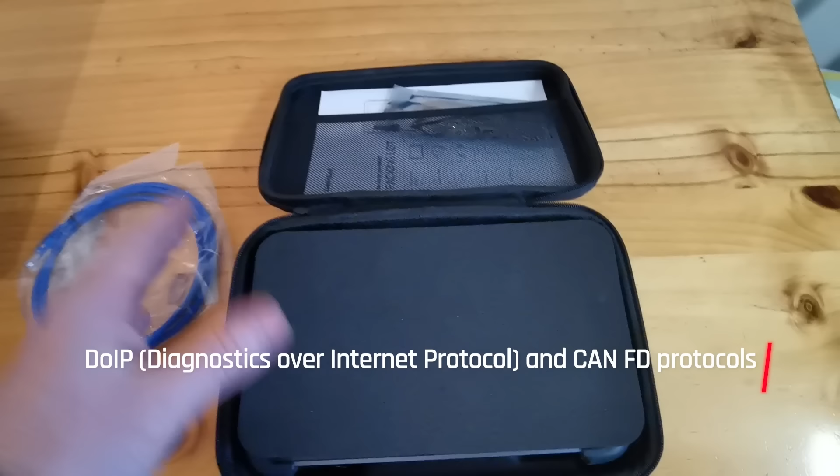So case wise, I absolutely love this type of case. Very nice carry case that you could store in the back of your car if you're traveling and you want to have a scan tool with you, or if you're doing mobile diagnostics as well. It's very compact. On the inside of the case, we have the Ethernet cable. This is capable of remote diagnostics, so DoIP, diagnostic over internet protocol, is capable on this scan tool, which is very good for the price range. What do we have here? That looks like a phone line connection to USB.

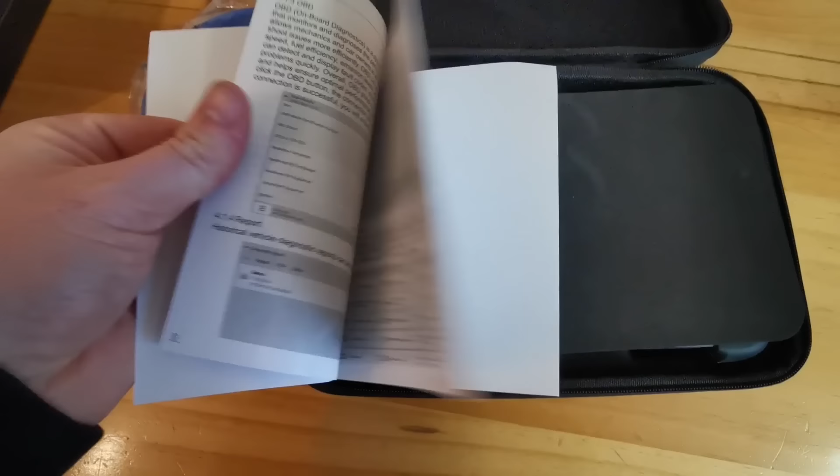Top section, we have the packaging list that comes with it. So we have the scan tool itself, network cable. The F chassis cable is going to be the cable that you hook up the Ethernet connection to while it's plugged in. Packaging list, user manual. So we have the 3-in-1 charger, Type-C cable, network cable, and the dongle, the connector itself. We also have the quick start manual for reference, and a breakdown of what you need to do to start it up or set it up. Foam cover to protect the screen, and on the actual diagnostic tool itself we have a screen protector, which I'll take off now.

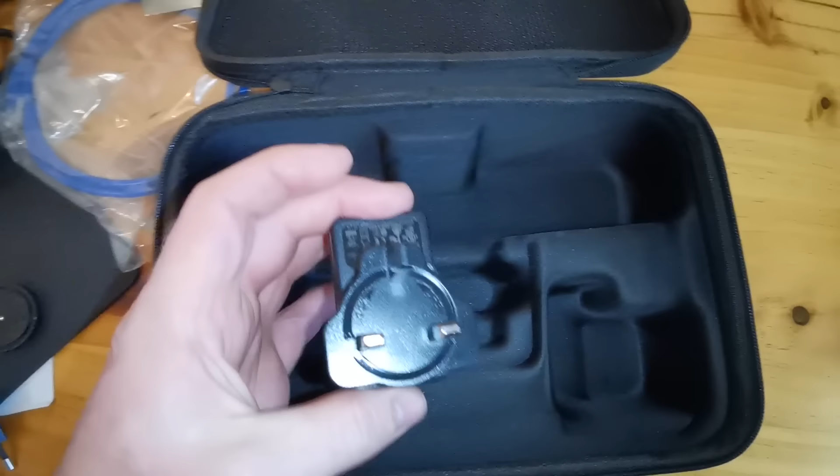Okay, so in the package itself, we have that cable that hooks up. You plug the dongle in one side, you have the Ethernet cable on the other. We have the charge cable. We have the two different connectors, depending on what region you're actually using this in. And this is the one that's suitable for Ireland. There is no connection suitable for Oz in that packaging, but you can get something if you needed it. That's the one that we'll be using in this region. So very nice case, easy storage, nice protective covering. I like that a lot.

Let's have a look now at the actual tool itself. Very nice stand that's on it. That's the full extension of it, but it's rigid, meaning you can hold it on the steering wheel easily. It's not going to flop around.

I have done it on a few vehicles already. This is notable, new design, magnet, so you can just store it nice and easy. There were some other scan tools that you'd plug it into the unit itself, but that's a very nice and simple way of storing that dongle for easy pack away.

On the top we have power button, we have USB and then USB-C, so USB-A, I think, and USB-C. Very nice design. You've got the ergonomic grip at the side. You also got the protective cover. This is the new style design from Thinkcar. So some of their older products were a bit more bulky, and this is more of a sleek design than previously. But that's the back side of it.

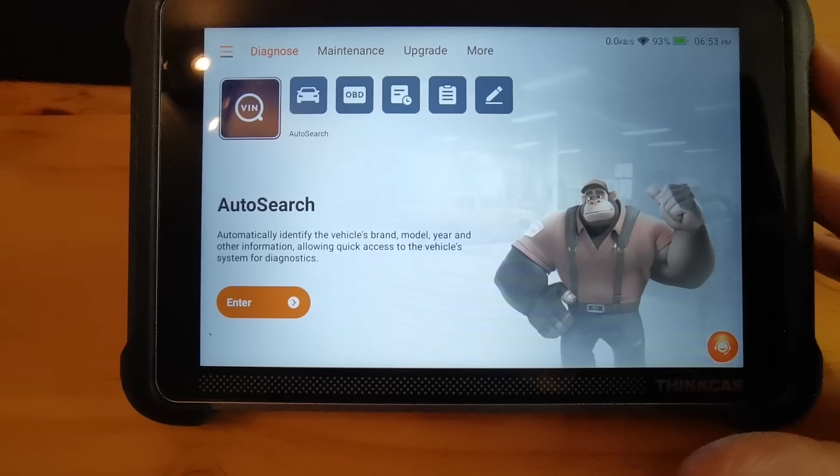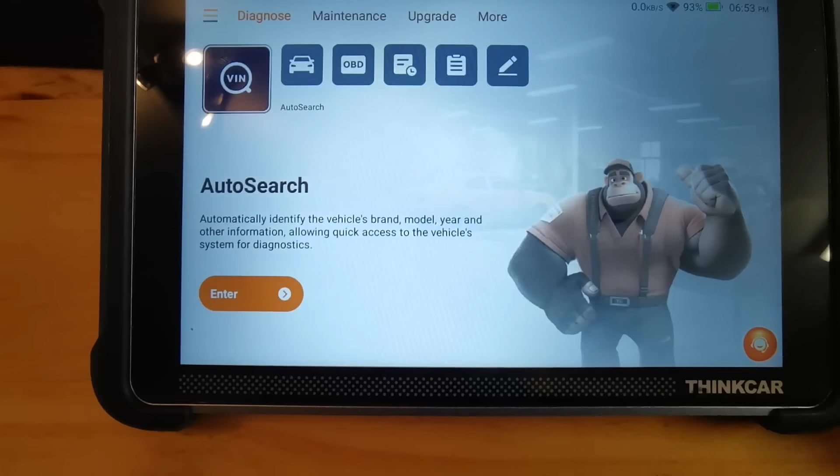I will turn it around and turn it on now so you can have a look at the front as well. Okay, so this is the home screen that you get when you power it on. Up the top section here we have the battery, we have the time. If you're plugged into the OBD, you'd also have the charge rate of the battery of the vehicle you're working on, which is also very useful. Connected to the Wi-Fi, you get the speed of how quick it's operating. Down here is a button for the remote assist, if you needed to use that.

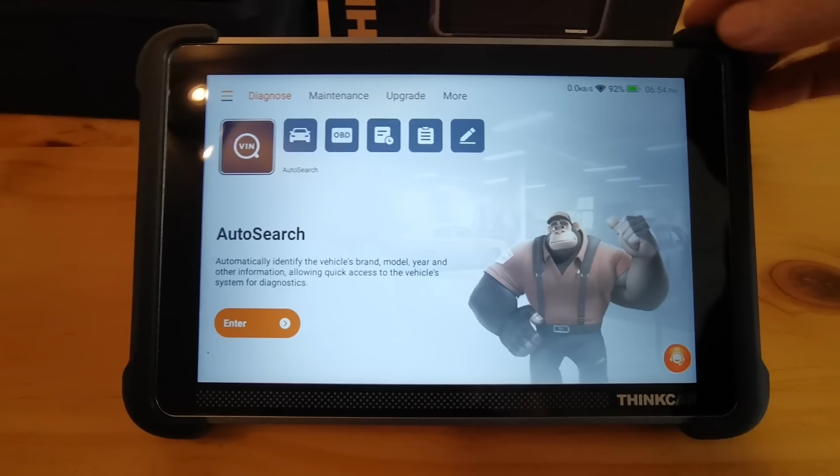But a very nice looking scan tool, ergonomic grip at the side, designed for a workshop environment, so easy, clean, protective. They do drop tests on these to make sure that they're fit for purpose, and they are well designed units.

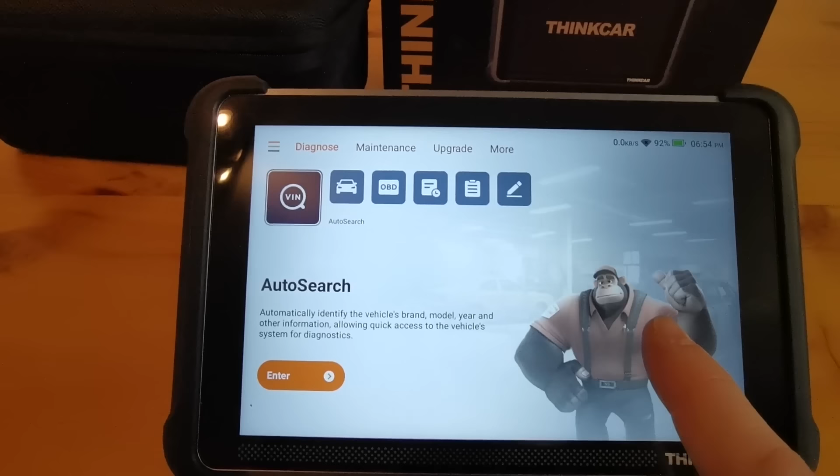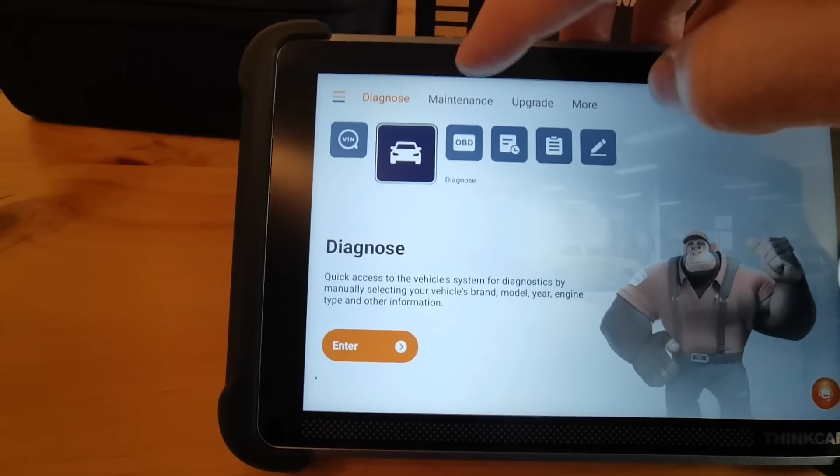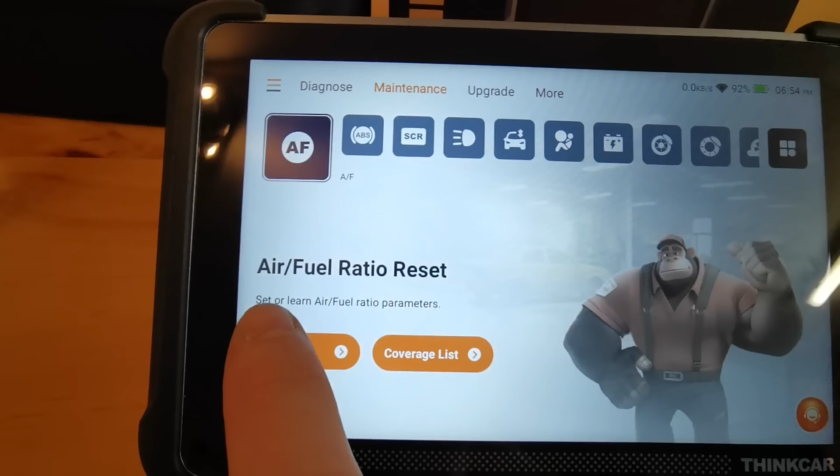Now, for the people that wouldn't be familiar with Thinkcar, this is a new style layout that they have. It's more user friendly, it gives a bit more information, so when you're flicking through it, if you weren't familiar with what the tabs mean, they break it down a bit more down here. So for example, on the maintenance tab, you would have typically seen all of these boxes laid out in a list type form, which you can still do. But this time it gives you what it actually is, so air/fuel ratio reset, and then it gives you a bit more information, set or learn the air-fuel ratio parameters.

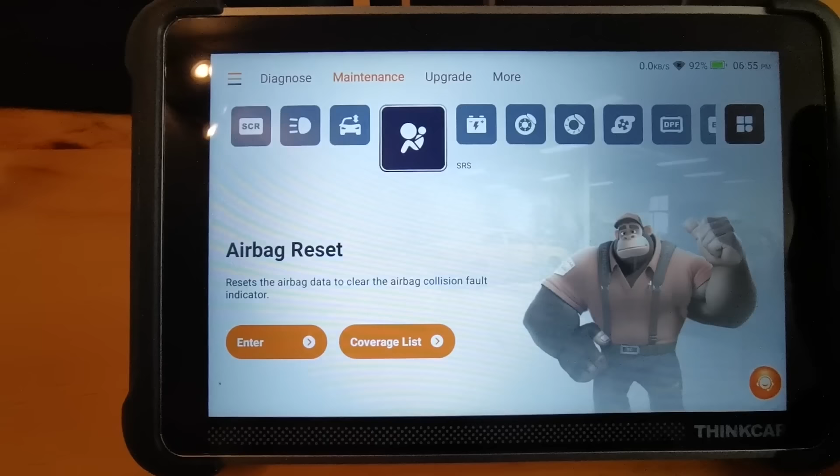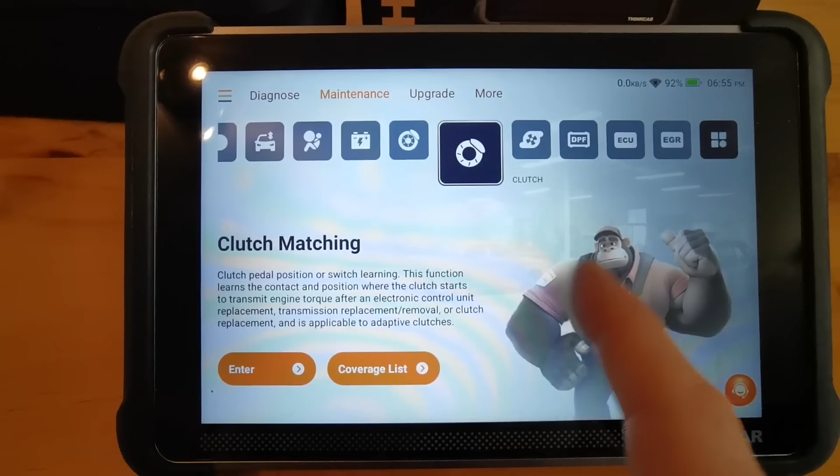So if you go through ABS, then it says ABS pump to push all the air out of the ABS pump, and so on. So you can flick through and it gives you a little breakdown of what that function would be useful for. So again, if you're not very familiar with using these scan tools and these symbols, if you're a DIY or new to the diagnostic scene, you would get a nice bit of information to make it easier for you to know what tab to go in and out of. Now, I have to say it is a very straightforward, basic and simple design, which is user friendly.

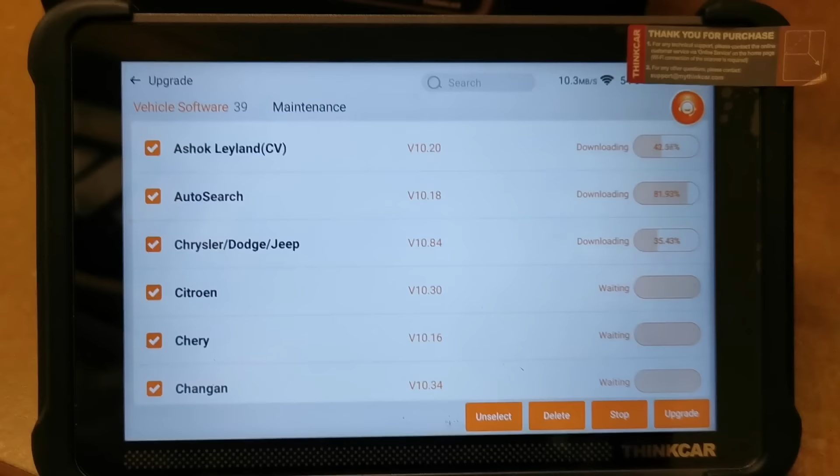Upgrade. I've already upgraded this. There was 40 something when I went on it first. Lifetime updates come with this. So if you go against some of the competitors on the market, some of them can be over $100 a year for subscription. Some of them can be more. So depending on what scan tool you are using, this could be a very good choice to save you money in the long term. Price point on this is excellent for what it says it does.

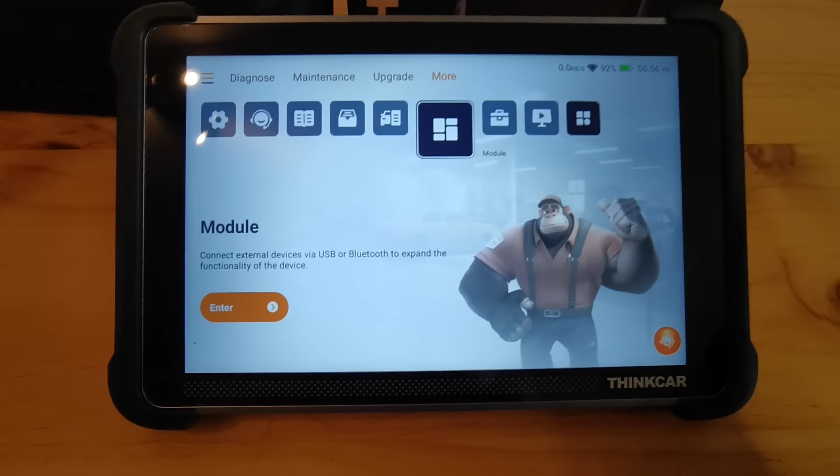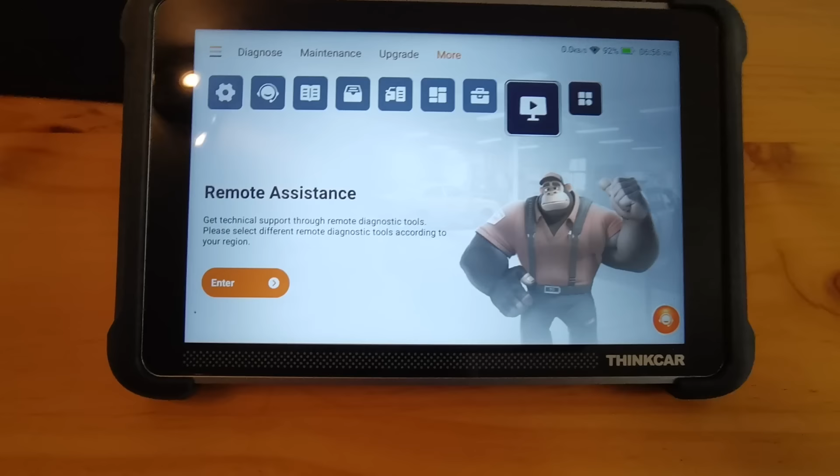I will run it through its paces, but it's a very fast scan tool. I wouldn't expect anything less from Thinkcar. Again, I've used them daily in the workshop now for pretty much a couple of years. I have multiple of their products, and I can say safely they're an excellent company and they make excellent equipment. So if this is anything like some of their other ones, I can imagine it will be a very good scan tool as well. That's an overall layout. That's enough talking on the unboxing and so on.

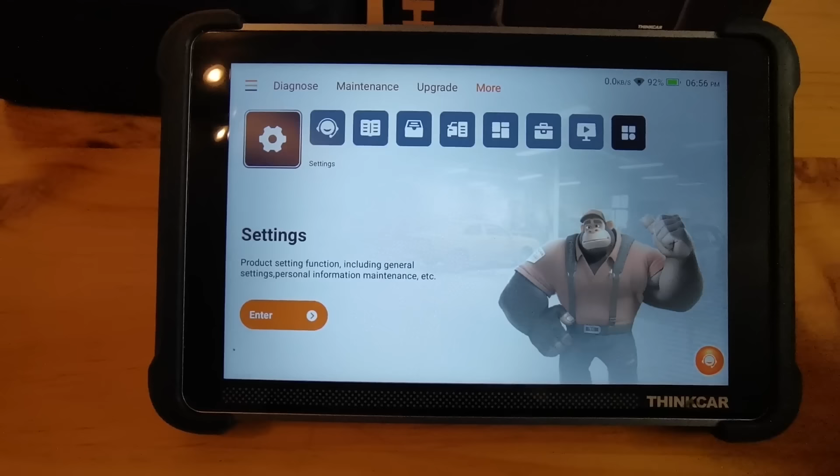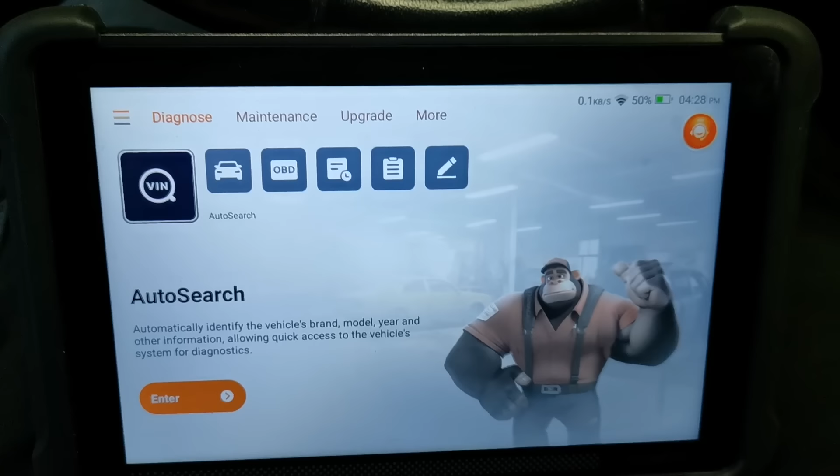I'm going to be testing this out for the next few weeks in the workshop while I'm back in Ireland here. I'm going to be checking on every vehicle I can. There's multiple Fords in the workshop right now. I have Mondeos, I have Focuses. I'm going to be trying it out on those. There's some faults on a Focus that I'm going to be testing. There's other vehicles as well that I'm going to be checking, and I'm going to see what it's like for coverage, what it can do, and how useful this might be in a professional setting and in a DIY setting as well. And hopefully there'll be a very good crossover where if you purchase this, you'll be able to use it in both.

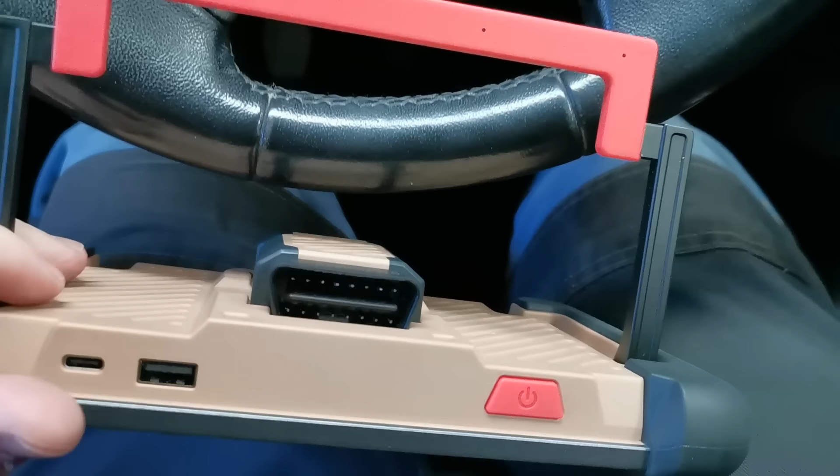Okay, so the first car I'm going to plug into is this Ford Focus. This is a 2011 model diesel. It's got some issues, got some running faults, so we're going to be able to pull some codes more than likely on this one. And I like, in particular, this stand. Sits nice and easy on steering wheels. Feels pretty solid overall. And of course, that magnetic dongle is a very nice touch.

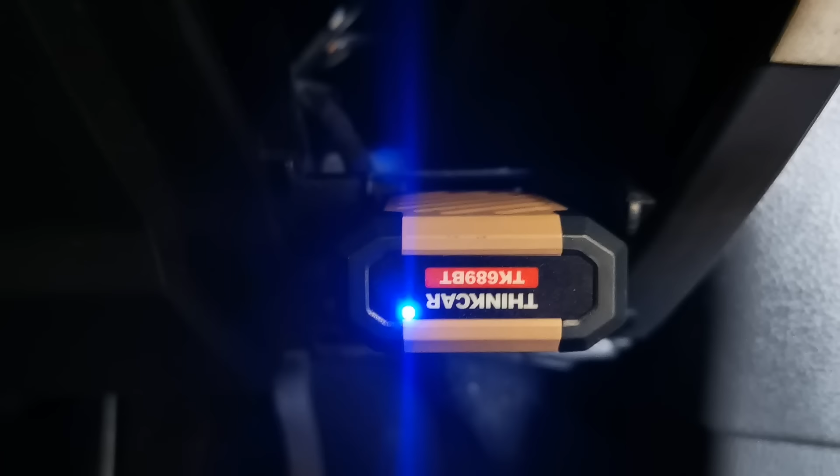So overall, first impressions are nice feel in the hand, good size and fast. When I did all the upgrades to start off, it was very, very quick. I'm connected to the Wi-Fi now as well, so we'll see what the function's like. So I have it connected up to the OBD, ignition on, and we're going to run a scan on it now.

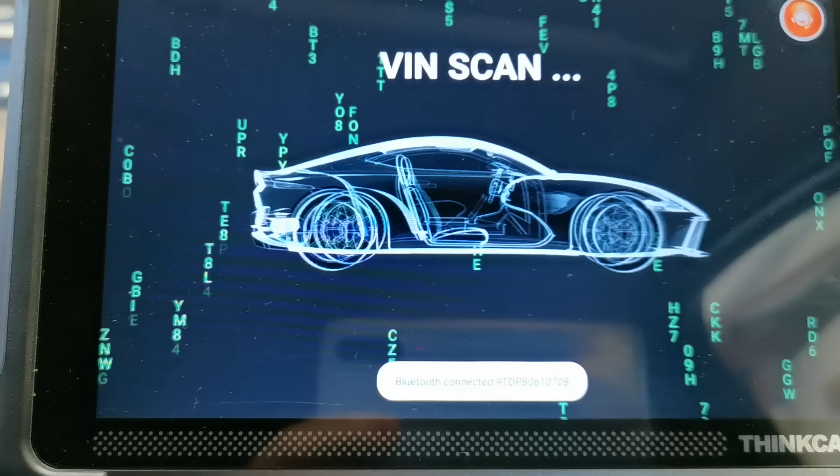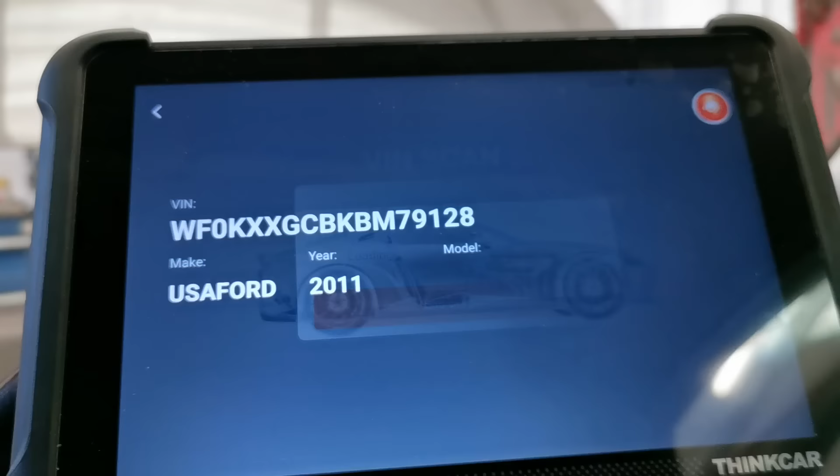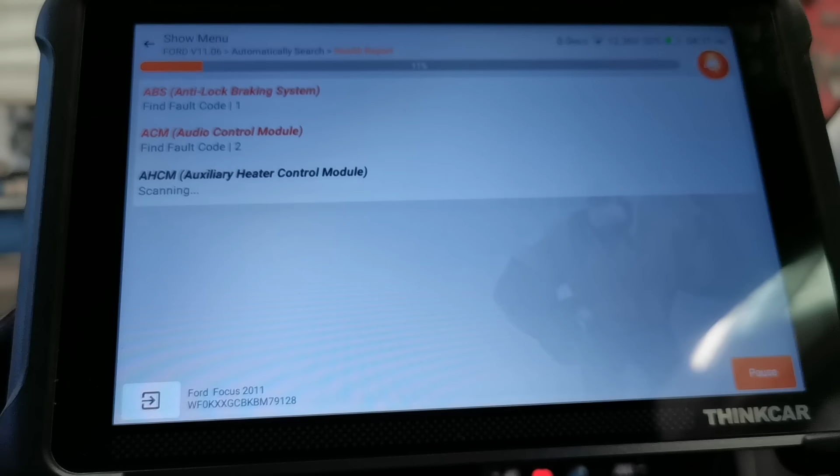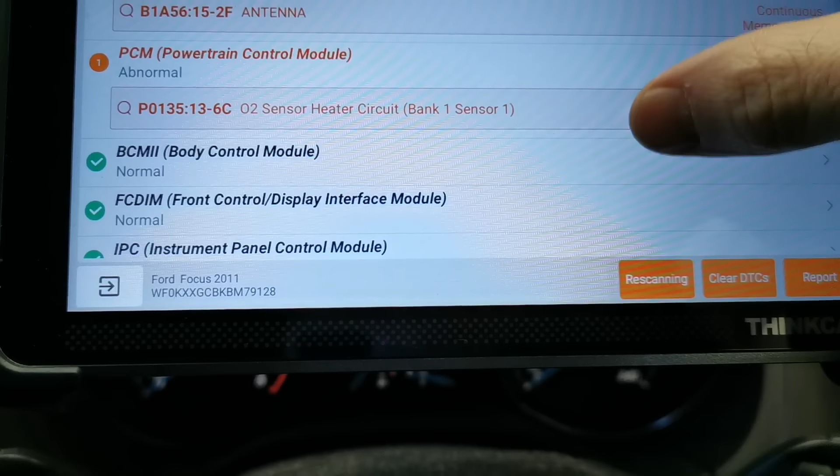So automatically search, okay. Yes. And we're going to do a health report. Okay, so it's gone through the whole process, got taken away from it from an inquiry, so I'm back at it again. We have a powertrain control module fault, that is continuous. I know what that one is.

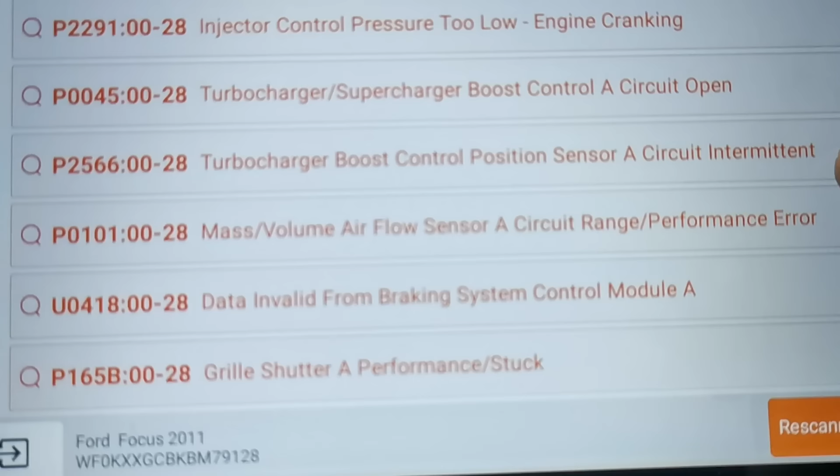There's more issues with this one, but the faults have been cleared previously. And thankfully, here's a screen grab of some of those fault codes before they were all cleared. Now, before I got onto this vehicle and started doing all my scans, there was some major repairs done, including injector replacement, turbo repairs, and other sensor repairs. This was a multiple fault vehicle that was being worked on.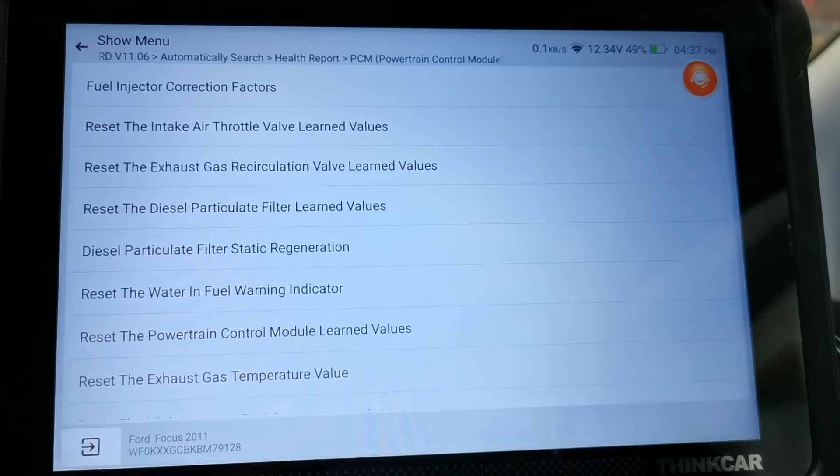The previous tech had done all the fuel related fault resets, like the fuel injector correction factors and relearns on the fuel system. What you're looking at here is me just going through the list of its capabilities on the Focus, and you can see it's extensive.

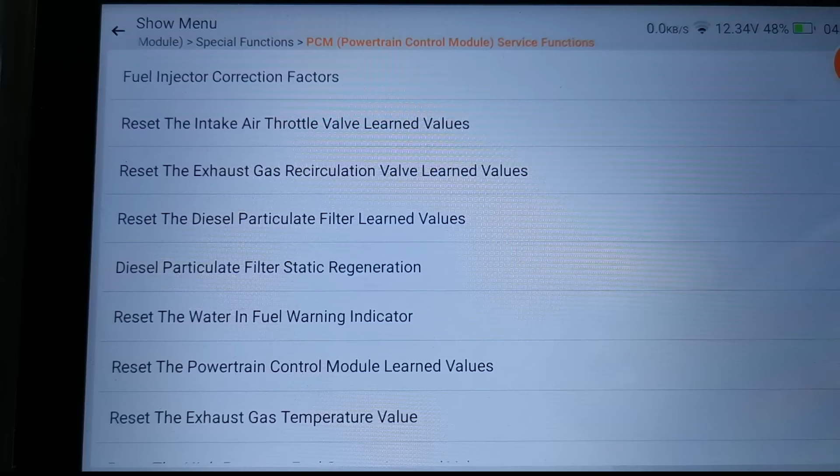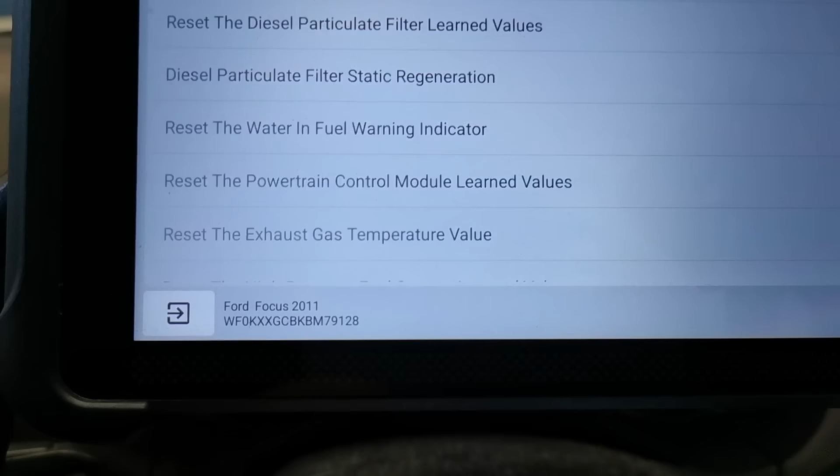You've got diesel particulate filter static regeneration, reset water in fuel warnings, reset powertrain control module learned values, reset the exhaust gas temperature values, and down here reset the fuel injector learned values. That was all done before I actually went on to it, and there was just boost related faults still remaining. Okay, so we got a lot of resets there, which is good. All right, so we're going to go to read data stream.

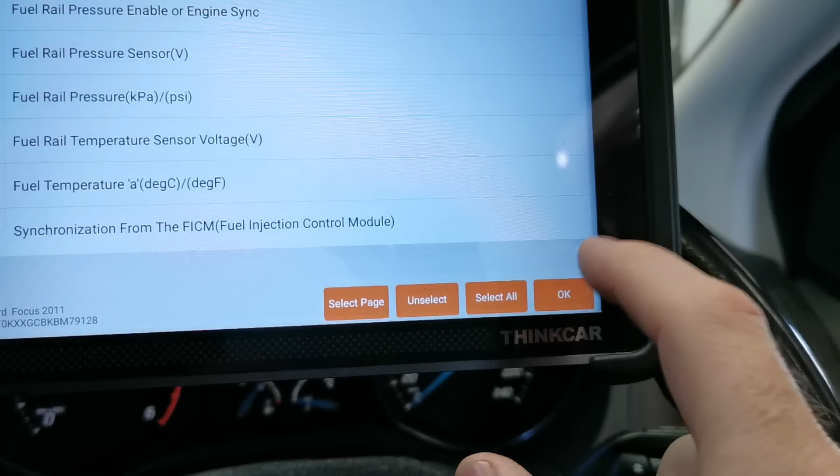And what you're seeing here is the live data information on the fuel rail pressure. So this is something I want to check, as there was injectors replaced. Everything looked good. The graphing functions very smooth in this. I did do a live data test drive screen record, which was also perfect. I then moved on to the turbo.

So on startup, I want to see the actuator arm move. And when the engine shut off, I want to see it go back in the same position again, because there was turbo related faults. One thing I did find out is the turbocharger learned values weren't reset, so that is something I wanted to jump onto after I had done my checks.

Resetting of the turbocharger learned values in this vehicle. It's another item that this scan tool is capable of doing, so it's got a lot of adaptation and relearn procedures that's inbuilt in it, which makes it an extremely useful and valuable tool.

Just pulled in after a large first part of this road test. All the lights are off, performing perfectly, no issues. I'm monitoring live data here beside me as well, using the scan tool, and this is all good. I'm going to give it another extensive drive all the way down, back to the workshop, and if nothing returns, I'm going to put back the covers up and this one will be all done. A reset of the turbocharger learned values is what has cleared this last warning off.

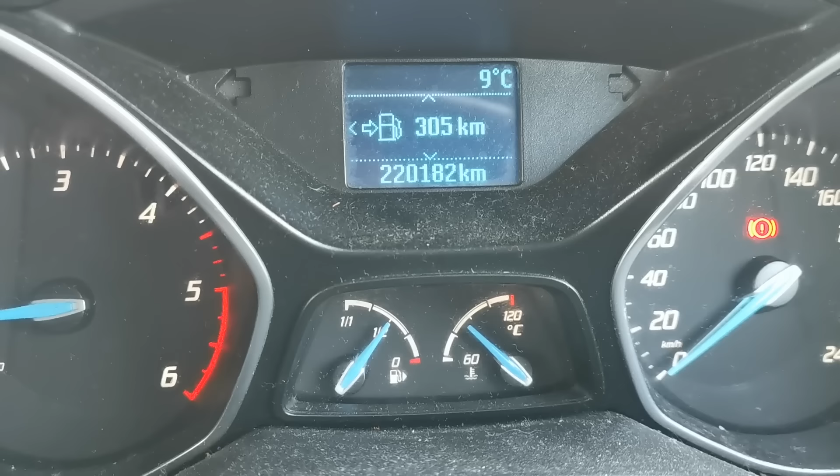And I wanted to insert these real-time clips because it just showcased how powerful this tool is. From start to finish, all jobs were done with this. So injector repairs were done, all live data information was done, test drives done afterwards, and then turbo related faults checked and resets done, which solved all of these issues, and this Focus was now good to go. So a great start to my first impressions on this scan tool, and it was now on to the next vehicle.

Okay, I was just in to change the clock, change it over to a European time zone, and what I found here is something I actually wanted to talk about in this video as well. So FCA Diagnostics and Renault Dacia Gateway Unlock. Security gateways in general. So if you're working on vehicles that have that security gateway and blocking off access, you're going to need a scan tool that's compatible so you can gain access to it.

Now, I've come across this a number of times when I've been working over in Oz, where we've been blocked from accessing certain, whether it's fault codes, whether it's certain parameters you want to check on. It's Jeeps mainly that I come across it on. But recently, even up to a couple of months ago, I wasn't able to do a service reset on a Jeep. I was blocked from accessing it. There was no manual reset, and it was going to have to be done through a scan tool.

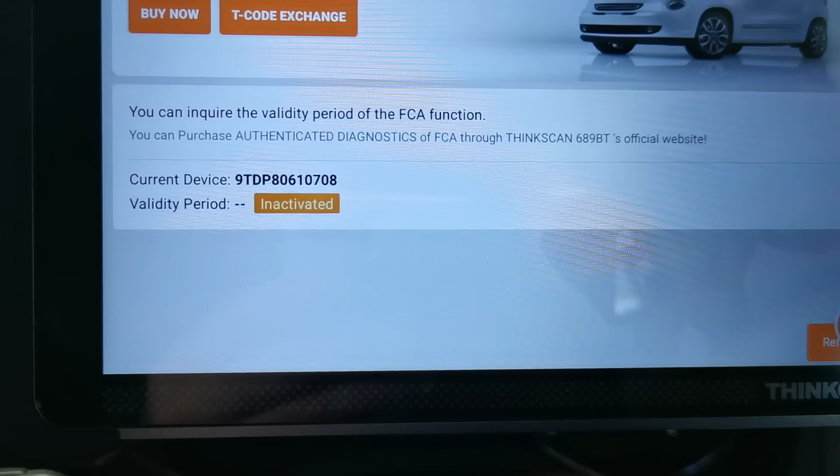And what you have to do for that is register. So if you've never come across this, it's fantastic that a scan tool like this is capable of doing it. It is an add-on cost, but if you're working on a lot of these vehicles, it'll be useful to you.

So it just shows here that they have authentication to do it. Thinkcar has cooperated with the FCA, and you only need to purchase authenticated diagnostics on the Thinkcar official website. You can directly use this device to diagnose using advanced diagnostic functions. So you have full capabilities when you purchase it using this tool.

For any of you that aren't familiar, there used to be a bypass cable that you'd have to purchase for the likes of Autel or other similar scan tools. You would have to locate where that bypass cable went into to get past that security gateway block, and you'd be able to read fault codes and do your diagnostic. Now it's as simple as hooking up your 16-pin connector as you always would, registering on the scan tool, and you'll have a 12-month pass.

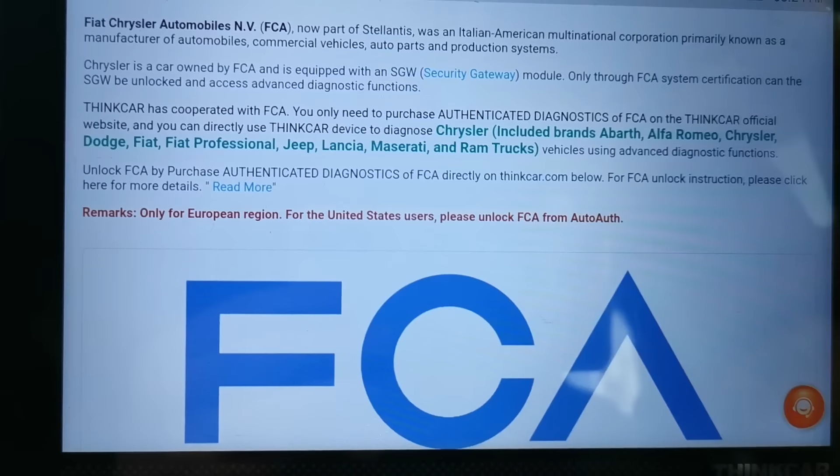And again, if you own one of those vehicles or you're working on a lot of those vehicles, having access to a scan tool to be able to do it is going to be imperative to you. So I just wanted to show that to you in case you would be working on those vehicles.

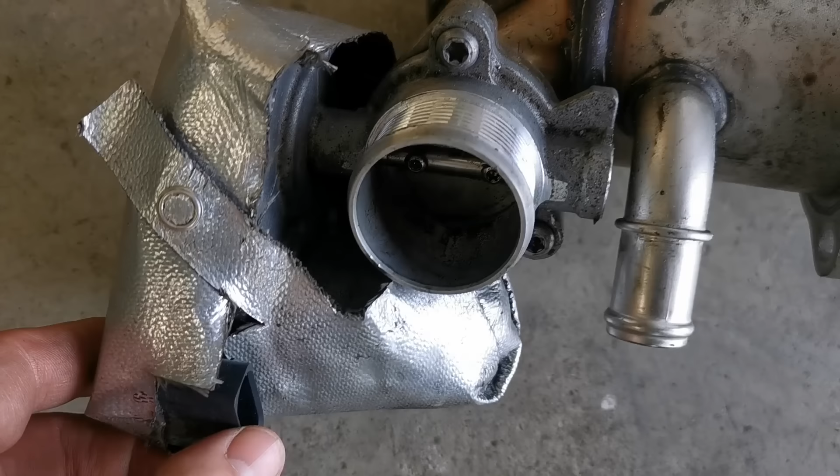Another vehicle that this was successfully used on from start to finish is this Audi A4. It had an EGR cooler failure, and all of the fault codes were pulled, cleared, and this scan tool is capable of bidirectional control. So everything we required on this job as well was done with this scan tool. In the next clip, I'm just going to show you some of the history logs of the vehicles that it was plugged into, because it's going to be an extremely long video if I go through them all, and you'll just get an idea of how effective it was.

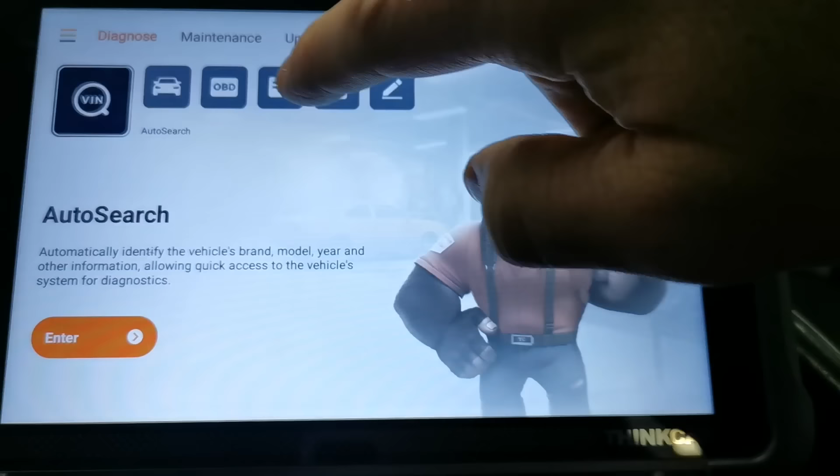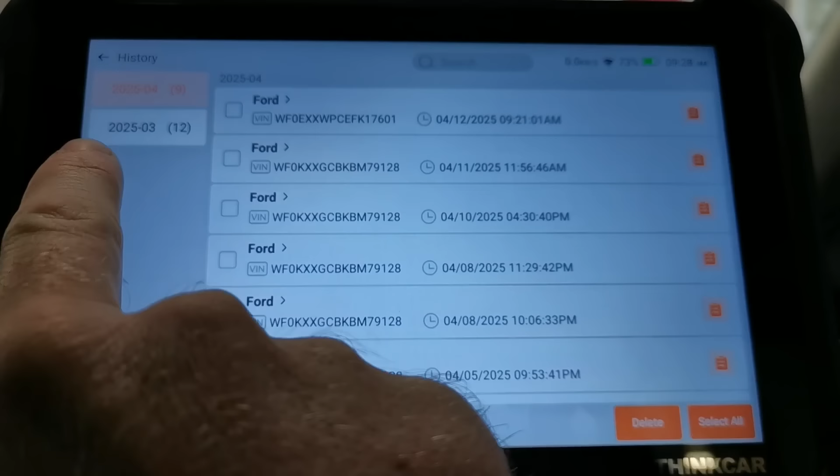What I wanted to showcase in this section is the history side, to give you a snapshot of how many vehicles up to this point in the review were actually looked at. So you're seeing Hyundais, you're seeing multiple Fords. Some of these are the same vehicles, so it's not all broken down Fords, but we have pre-scans, we have post-scans, and sometimes while we're working on a vehicle, doing test drives, checking, we might save a report as well. So that's why there's duplicates of vehicles in it. We have Nissan, Skoda, Peugeot, Audi, Fords again. Same Ford in that case, and you're just getting an overall idea of how comprehensive these reports can be.

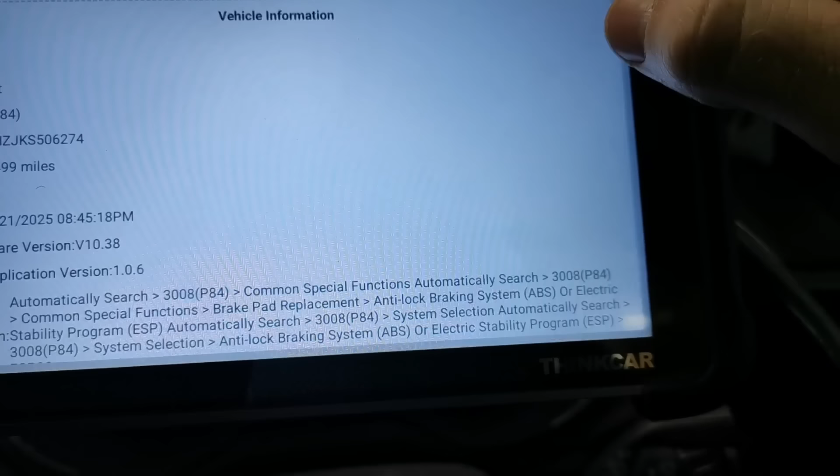So if you look here, you see the description, the fault code, what's actually being stated, or what module you're in when you're checking it. And then if we click into the Peugeot one here, it's showing that we have electric park brake, left hand actuator intermittent, again the diagnostic trouble code, the mileage, the time when you did this.

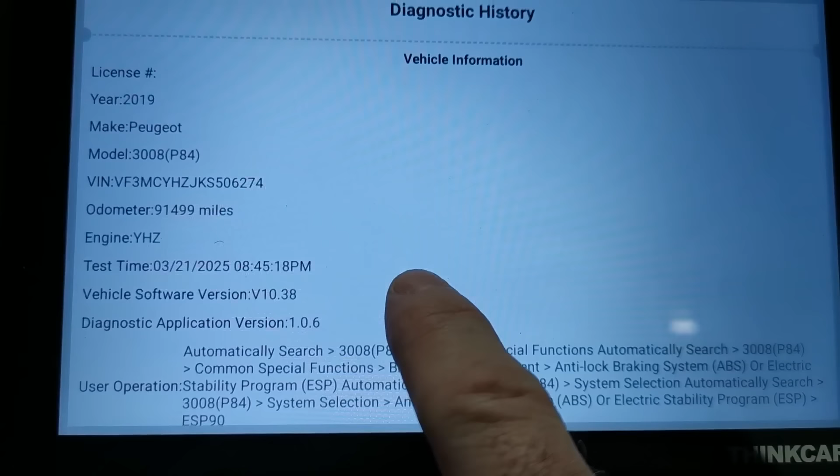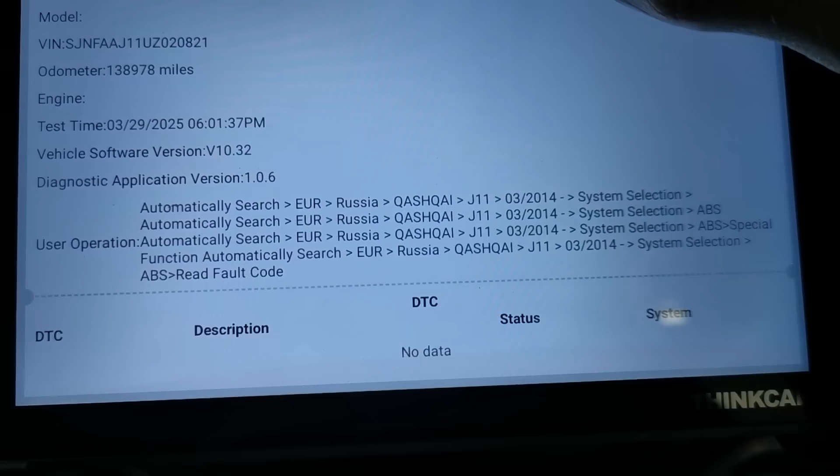And if you start to implement this type of thing in your diagnostic approach, pre-scans and post-scans, to demonstrate to your customer, it can be absolutely fantastic and worthwhile. I have definitely needed them tons of times over the years to show to a customer what was done, because they've had other faults in their vehicle and they think you haven't necessarily repaired anything. You can show, no, this is what was done and this is what you still have left to do.

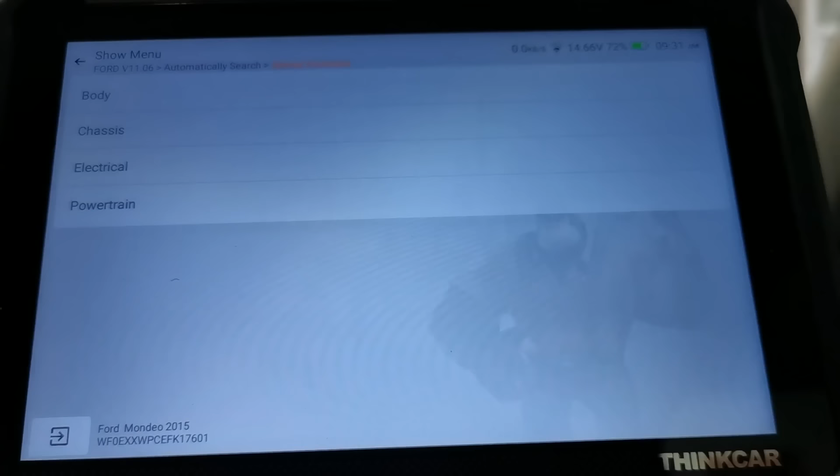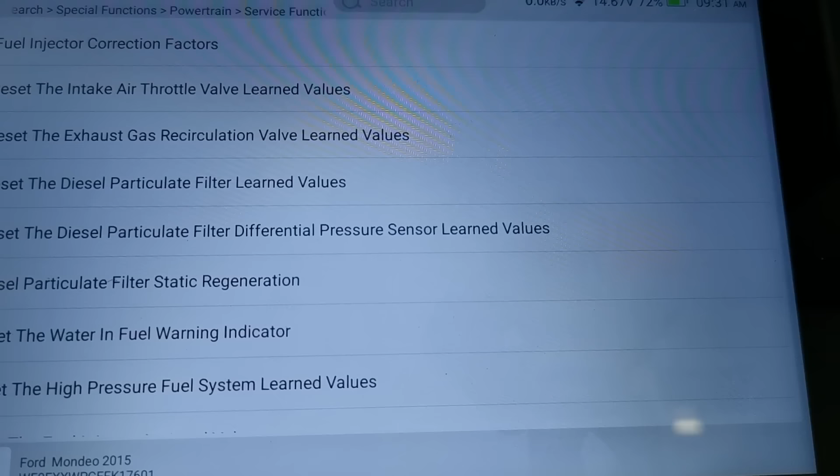2015 Ford Mondeo. I'm just going to try this out now. So if we go to special functions and we just look what we could do on the powertrain control module. So you see the list of capabilities it has. Fuel injector correction factors, reset the intake air throttle learned values, reset the exhaust gas recirculation learned values, reset the DPF learned values, reset the DPF pressure sensor learned values, diesel particulate filter static regeneration, reset the water in fuel warning indicator, reset the high pressure fuel system, reset the fuel injector learned values, reset the turbocharger learned values.

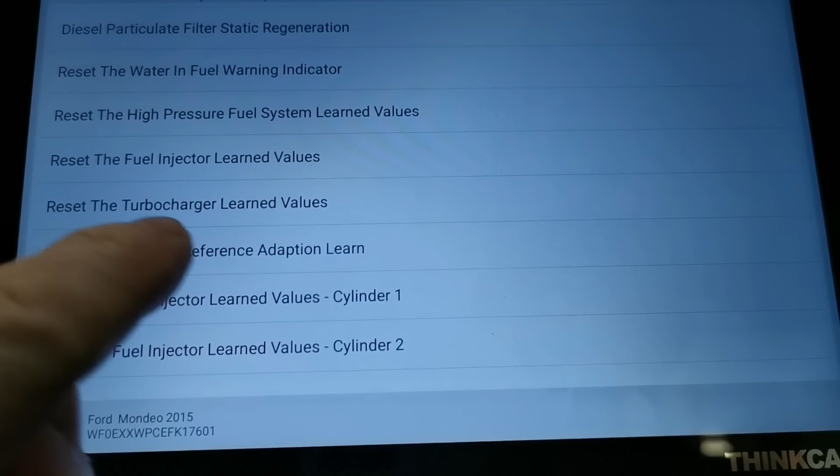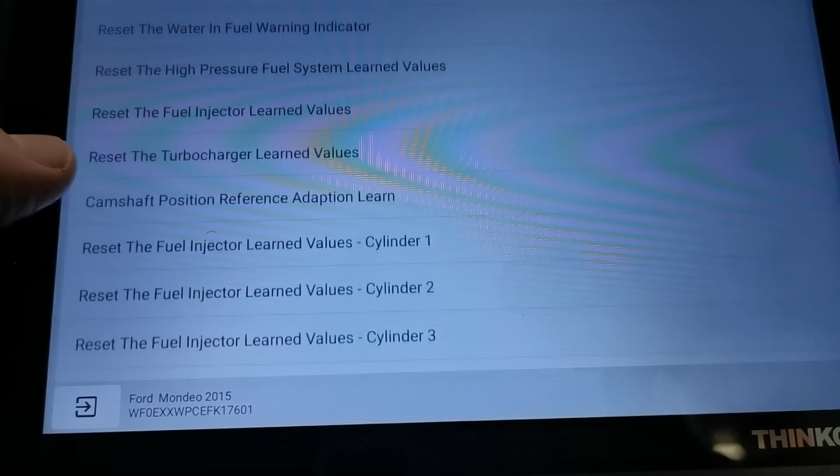This is one I'd done before. The fuel ones have been done before as well, the injector correction. And you have reset the high pressure fuel system. So camshaft position reference adaptation learn, reset the fuel injector learn values across all cylinders, 1 2 3 4, reset the NOx sensor, reset the NOx sensor learn values in the rear, so front and rear, reset the low pressure fuel pump, reset the active grille shutter, reset the high pressure. So for the price point of where this tool is at, the ability to do all of those is exceptional.

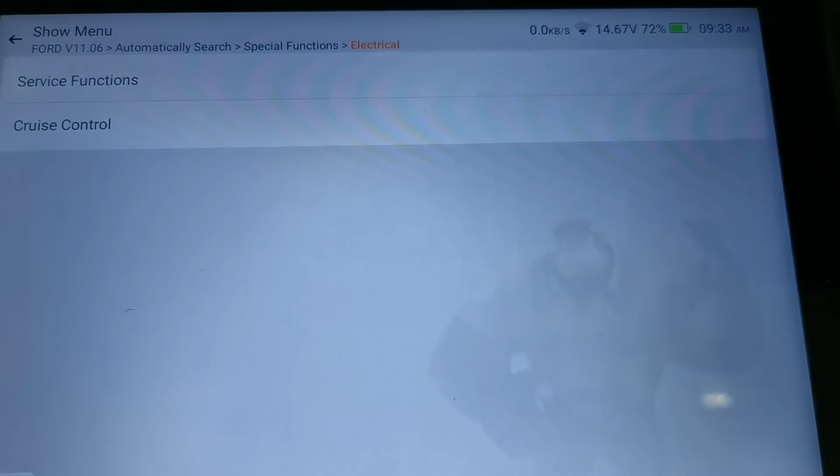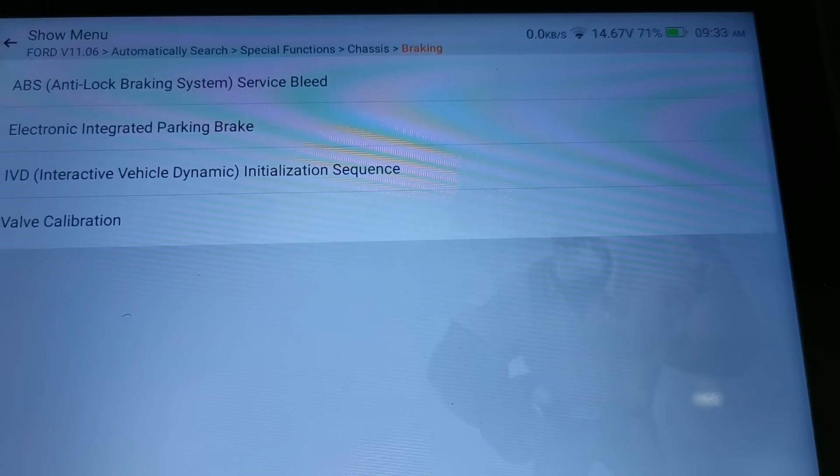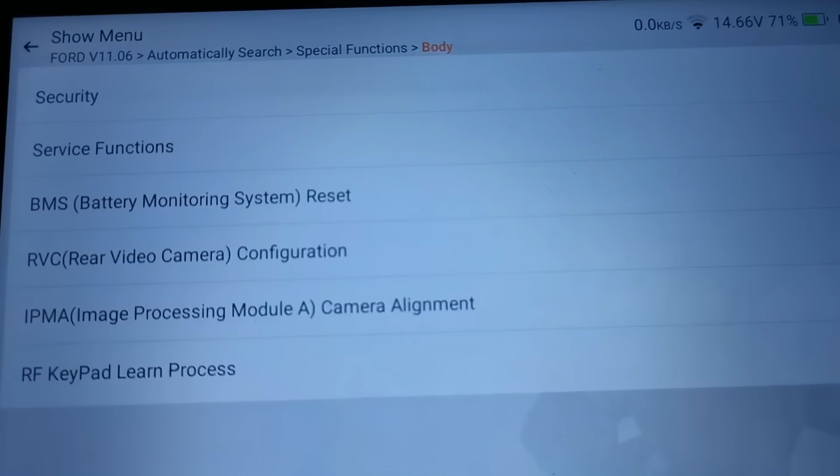And then we'll go to body. So we have security, we have service functions, battery monitoring system, rear video camera configuration, image processing module A, camera alignment, keypad learn process. So we'll go to service functions and you can see the CEI lock configuration. We'll go to security. We have keyless entry code, remote start.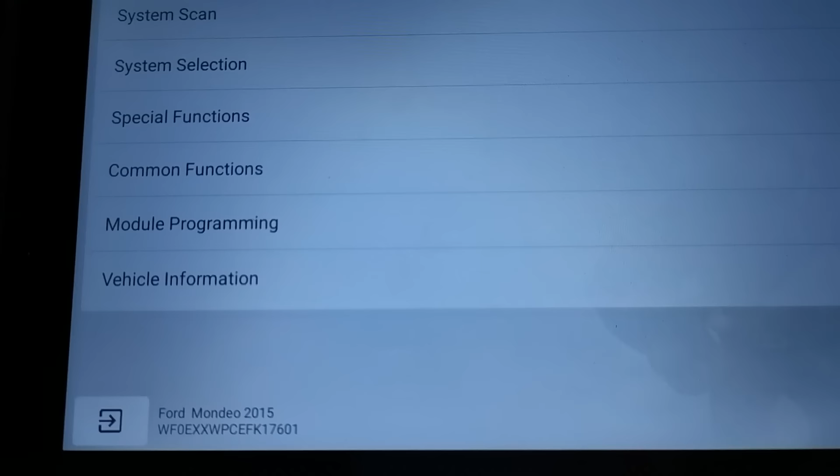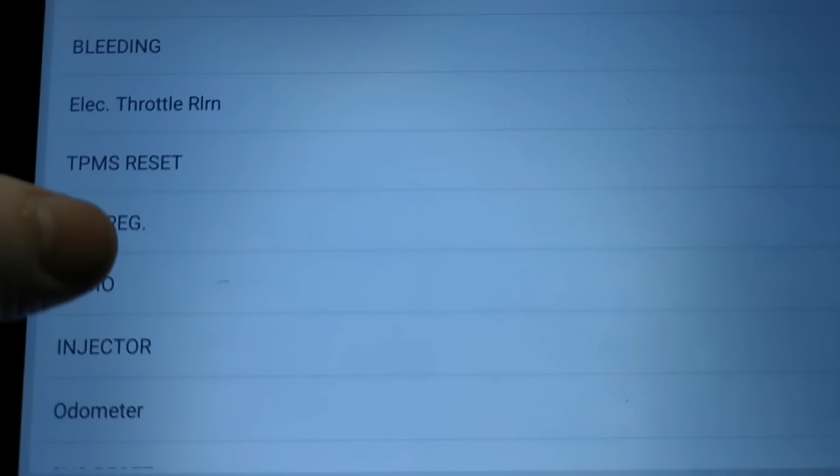So what a list of stuff we have in that. We'll go to common functions and then you can see all of the different things that's possible with it: EGR, throttle relearn, steering angle sensor reset, electric park brake. So that's a lot. I'm not even going to be able to show all of this in the video because it's just going to take too long on one vehicle, but that is so much that one scan tool is capable of doing, especially again at the price point it's at.

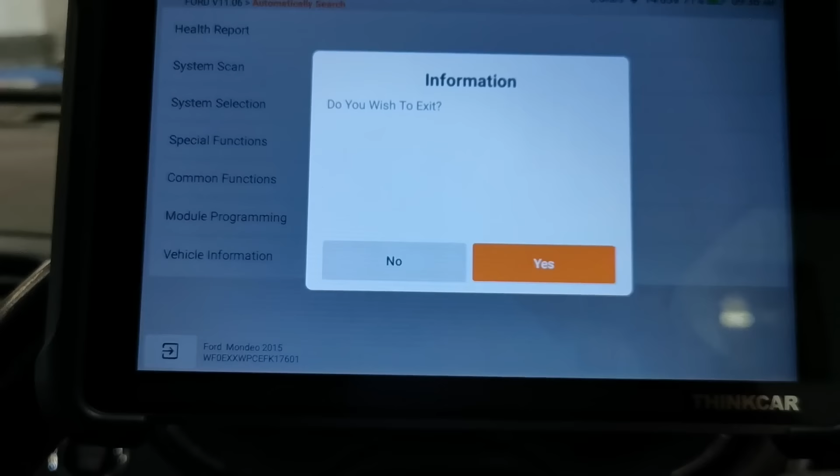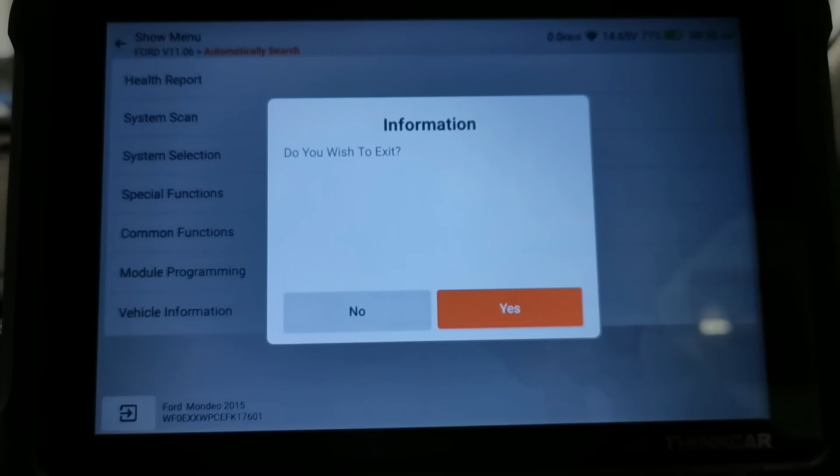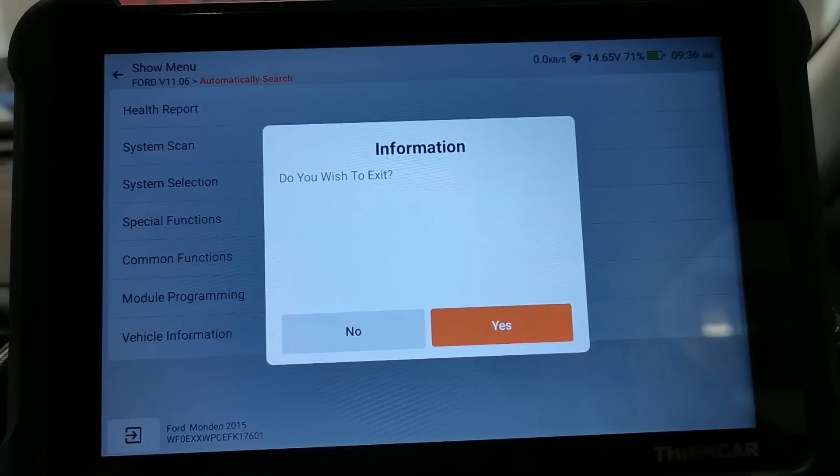You're talking about small money overall compared to where scan tools used to be. So I think it sits very well package wise, capability wise, functional wise in a professional workshop or DIY if you have a few family cars or you do a bit of hobby work yourself. This is going to cover a lot of vehicles for you.

And the last vehicle example I want to show is an all-electric vehicle. This is a Renault Zoe. This is the newer version, and again we have a gateway block on it originally, but you do have two options on this to unlock or not unlock. In this case, I just wanted to go through in the unlocked section and do a health report. I wanted to see what it was capable of information wise pulling.

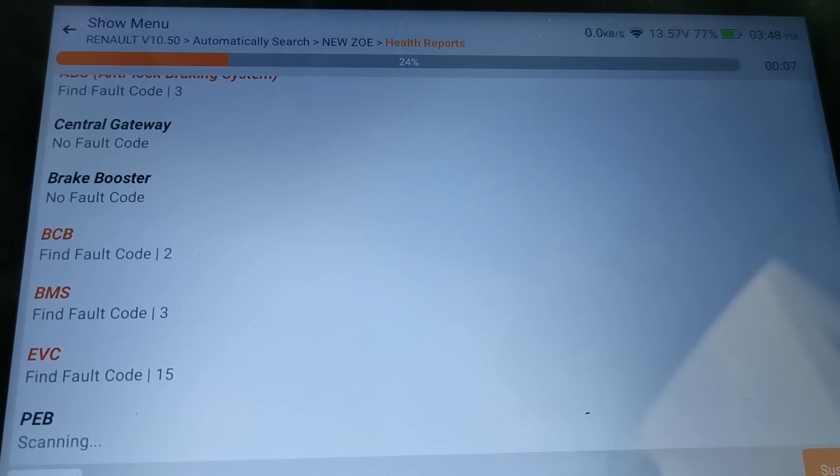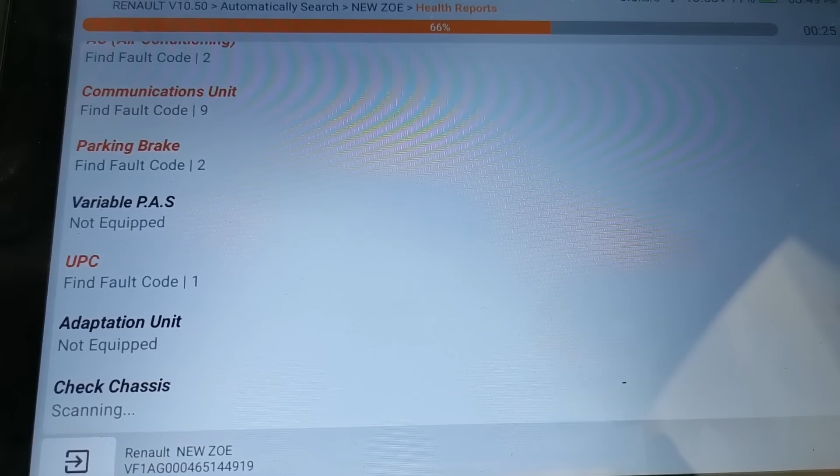I also want to see if we could get into live data and how much we can actually interpret in the unlock section. Again, if you were working on these vehicles, you can purchase that gateway pass, so you would be able to get into all of its capabilities. But in this demonstration and on this check, I just wanted to see what it was capable of reading.

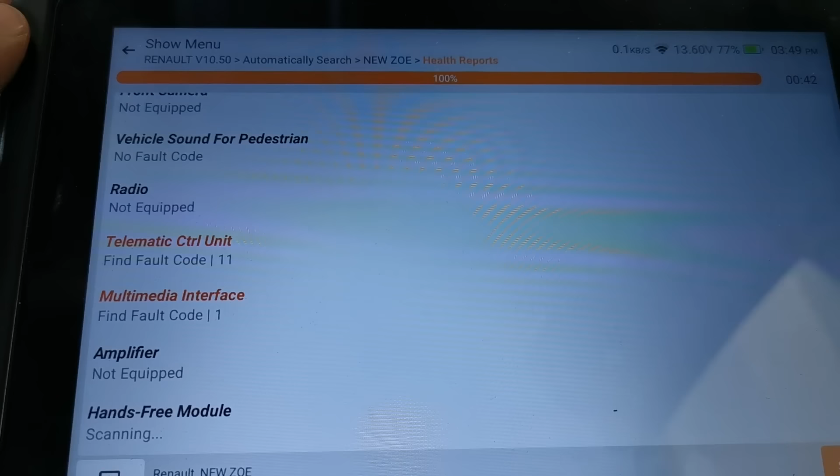Now, straight away you can see how fast it is. This is a multiple module, relatively new vehicle, and it would take multiple minutes on a lot of other scan tools to complete this. It has it done in under a minute, and we have all the fault codes found. So 19 systems, 72 diagnostic trouble codes. I do know that this was into the dealership for some work not that long ago, where there were some issues with different refrigerant and power issues.

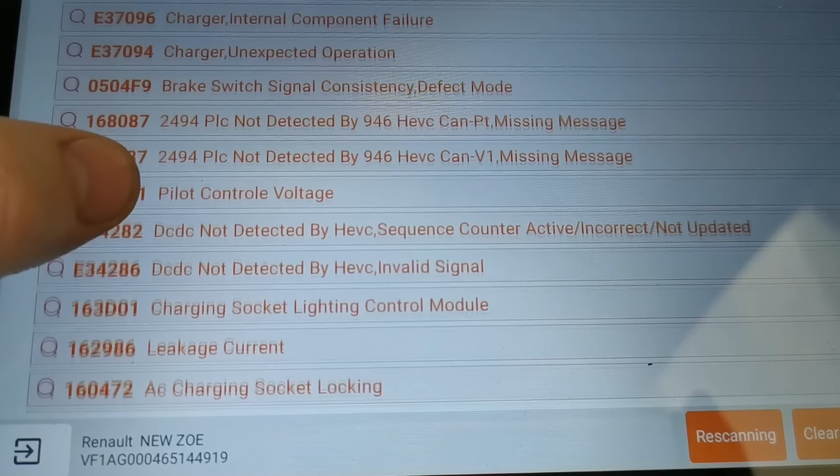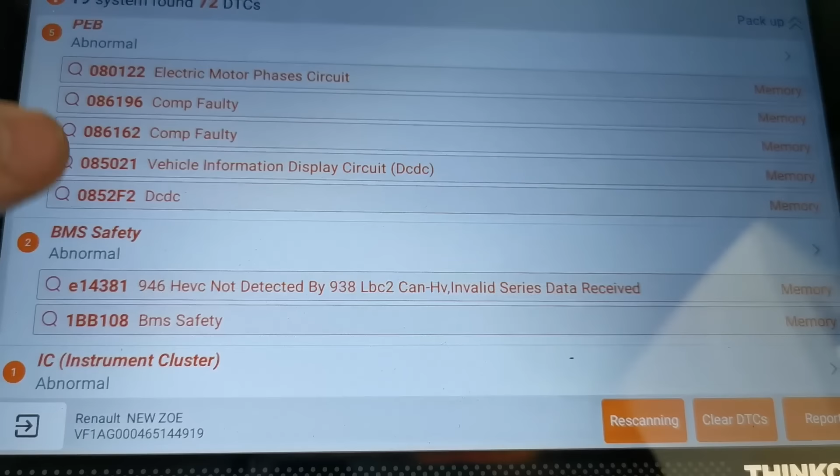So we have a lot of fault codes stored here. A lot of them will be historic codes, I imagine, that weren't cleared when it was into the dealership for that original check. While there's no current issues with the vehicle, it's driving fine, it's charging fine, there's no warning lights on the dash, it's still fantastic to be able to pull all of this information from the memory of the vehicle and showcase to the customer what was previously stored.

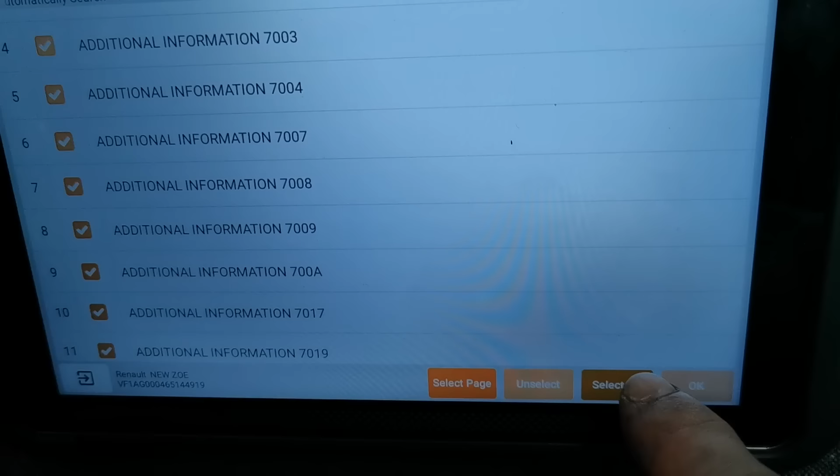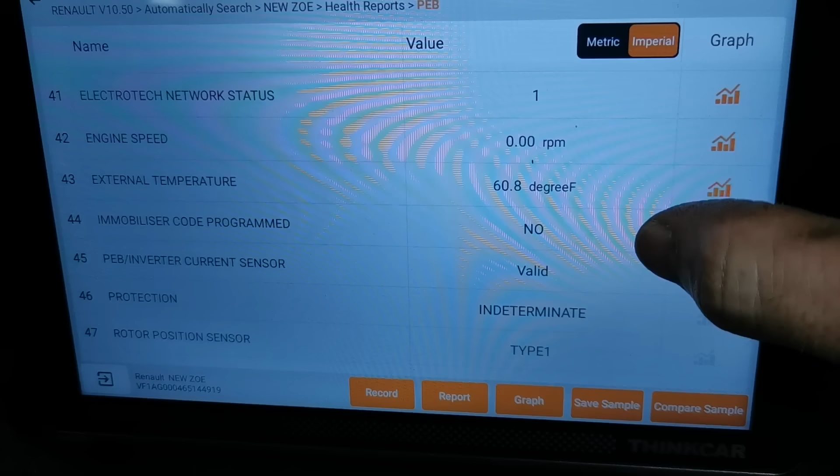We also have the ability to clear the codes, which I did, and this is me looking at the live data section of it. So I want to see how many PIDs it's capable of bringing up, and as you can see here, we're up to number 15, 16, 17 and 18. Now the first wave, we just have additional information and some numbering to the side, so it's hard to pinpoint exactly what that is. But as you go down further, you can see here electric motor phases, external temperature. We're getting exact identification on what those PIDs are.

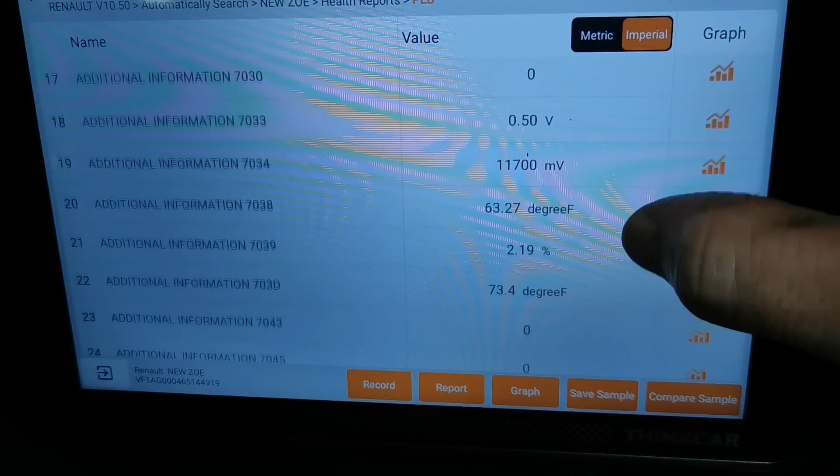So that's extremely useful if you're working on this vehicle, and to have that at this price point of a scan tool is absolutely fantastic. And it's just another example of how in detail this can be, even when you haven't paid for the additional gateway lock. You're able to pull this info.

And that is it for this review. That is the Thinkcar 689BT, an absolutely fantastic bit of kit. Thinkcar have done an excellent job on this. I would highly recommend it for the price point it's in. It's going to cover a vast majority of jobs, and the information I've collected from the workshop that's been using it daily since is it's still their number one go-to item. They have more expensive equipment and they can grab any amount of different pieces to use on vehicles, but the Thinkcar is the number one that they go to.

I also want to say, of all the entry-level / mid-range scan tools I have done in the past on my channel, this is the number one. Now bear in mind, those other scan tools are a number of years old, but this would definitely be my number one DIY purchase if you're looking for a scan tool.